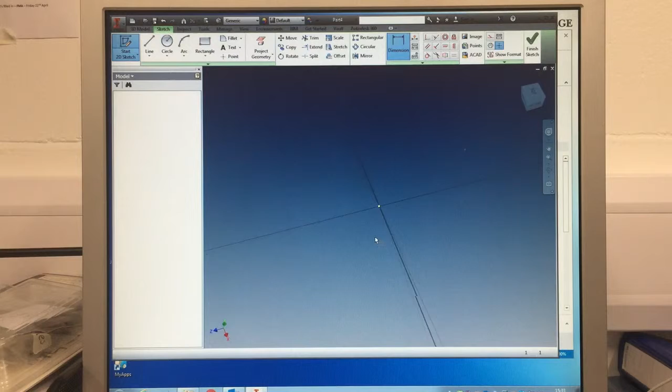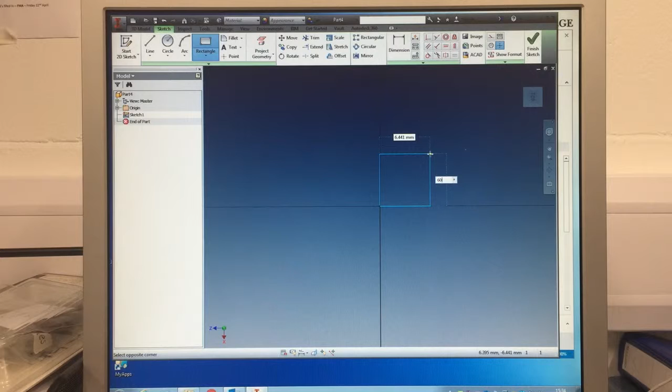Next, take your rectangle, click on the drop down menu and click 2-point rectangle. You can now come down, click on the center point there just once and then move your cursor. You can see the 2 dimensions here. If you tap in 60 for the first one and then press Tab, which is 2 buttons down from Escape in the top left of your keypad, okay, you'll then go to the next dimension and you can put 43 in for that one.

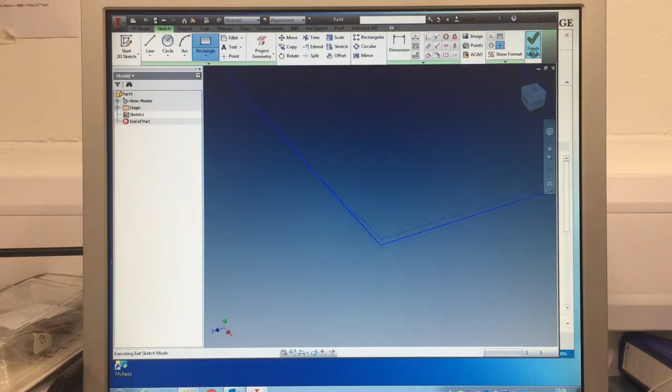Okay, press Enter. Now we're so zoomed in that we can't see our square. So if you click on the Zoom All button here, that will then bring everything into focus. Okay, you can now click on Finish Sketch and we go back to 3D mode. Zoom All again so you can see it all.

Click on Extrude, and your extrude may not have a drop down menu here. You need to make sure you drop that menu down, okay, so you can work on it here rather than over here. It's a bit easier. Change that to 20 millimeters, okay, and then press OK.

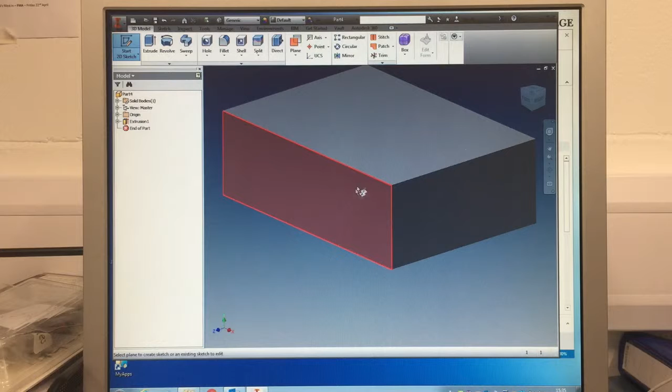Okay, next we want to put a 2D sketch onto the side. That's the long, thin one, okay, not this side or this side, this one here. Put a sketch there. You next want to project the geometry, okay, and this transfers lines from other places onto our sketch. So we're back in the 2D mode here, and we want to project geometry of that line, and that line there. Okay, you can zoom out a little bit.

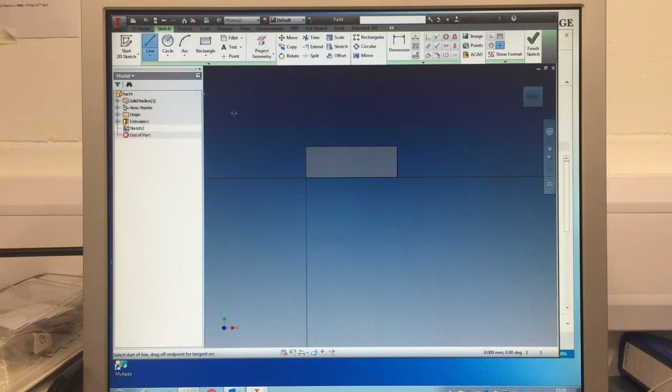Use your line tool next and click on this bottom right hand corner. Click there and you can see here you can change the dimension. So you just click once, don't click and drag. And then if you make sure that it's horizontal, you'll see that the degrees is 0. Make sure it's there on 0 and then you can just enter 10 and then press enter.

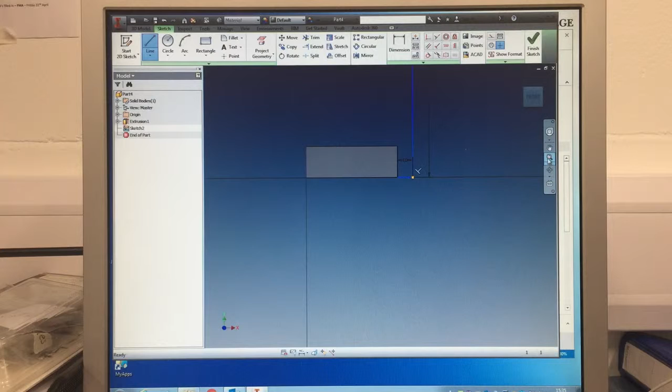Okay, you can now see we're going up, so then make sure you're vertical so that you can see 90 degrees here, and then tap in 140 and press enter. Okay, you can't see the top of a line, so we're just going to click zoom all so we can see it. Make sure you're horizontal again and going towards the left and press 20, enter.

Then come all the way down until you get down to the bottom area there. It should be 120 automatically. Okay, make sure your line is straight where it hits the top of that line. Now your line tool is finished there. You'll need to click once again onto the end there, and then click once again and click on the end there.

Okay. Now the next thing we want to do is we want to put in our housing joint, or an area for our housing joint. So I want you to select 2-point rectangle. I want you to lock onto this line here, click once and let go, and then just draw a square roughly something like that. You're going to use the dimension tool this time.

You can either dimension the height of this square by just clicking on this line and coming out and clicking 20, but that's not the best way to do it, so I'm just going to use my back button to show you how to do it.

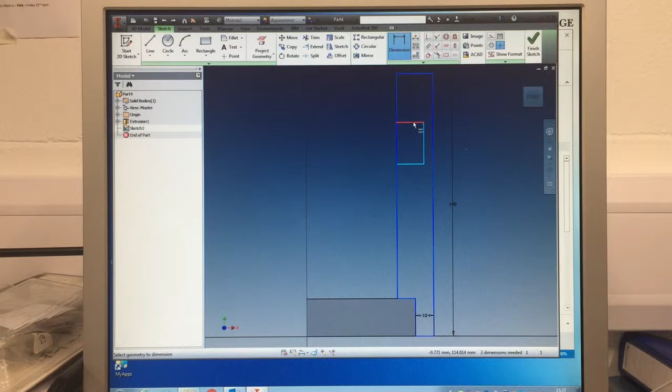The best way to do the height is actually to click between the 2 lengths of the line. So if you click on dimension, you click on the top part and the bottom part of that line, then that dimensions it easily. So click on the top, it thinks you're doing that top line, then click on the bottom of the line, okay, and then come across to the left there. Click there and then you can just put down 20 like that, and that changes that dimension.

You also want this area to be 10 millimeters wide, so instead of just clicking on there and bringing it down, I'm going to click on that line, it thinks I'm doing that 20 line, until I click on the edge here, and that is then between those 2 areas. Click once again and then you can click 10. And that's now changed to 10.

The last dimension we want to do is between the top and the bottom, and this is why I teach you this technique, because you can't select just that line there between there and there. You have to click the top area, it thinks you're doing the width, until you click on that line, and then there. If you bring that out to the side, you can now change that to 40.

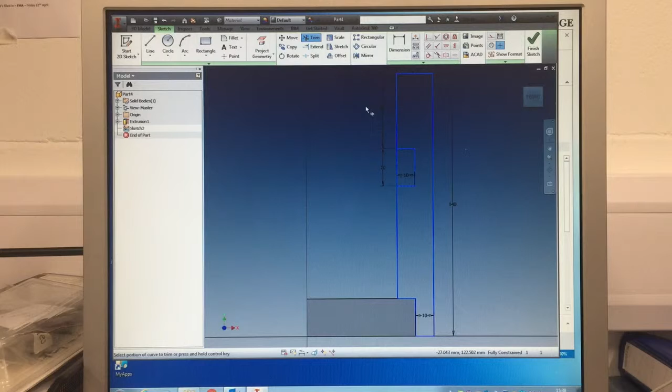Now we want to get rid of this little area here, so you're going to use the trim tool. Click on trim, come and click once, that's got rid of the first line that we drew for this rectangle, then click again and that's got rid of this line that we drew for the whole thing. Okay, and that's now gone.

Finish your sketch, zoom all so we can see it all, come to extrude. You didn't need to select it. If it doesn't select it, you just press that button there and it should select it. It's going the wrong direction, so I'm going to click on this button here to change the direction. Then I'm going to change the dimension to 43.

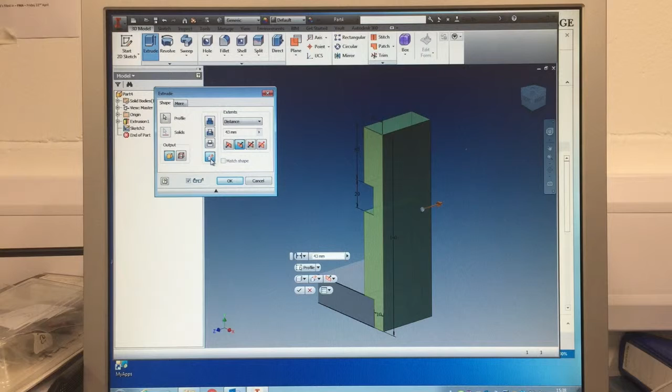Okay. The last thing I want you to do is click on New Solid. New solid means that it is making it a different material, so two separate bits of wood. Okay, then you can click OK.

Okay, so lastly we need to do our last piece of shelf, so we're going to put a new sketch, new 2D sketch. Make sure you always click on 2D rather than 3D. So 2D sketch, click on the side here, zoom into this area here and project geometry of this line and this line. That is bringing it forward onto our sketch.

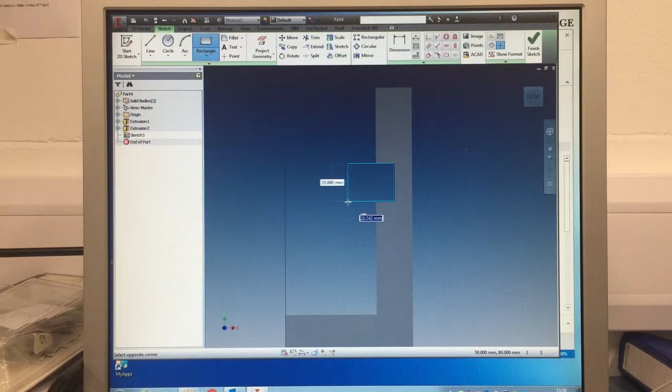Then use a 2-point rectangle, lock onto the top area there. If you bring it down, it locks straight onto 20 because we projected geometry. Then you can just tap in 60. Once 60 is tapped in, you can just finish your sketch, extrude, select that area. It's going the wrong direction, so click that area there, make sure it's 43, and then you can just tap on new solid to make sure it's a separate piece of material.

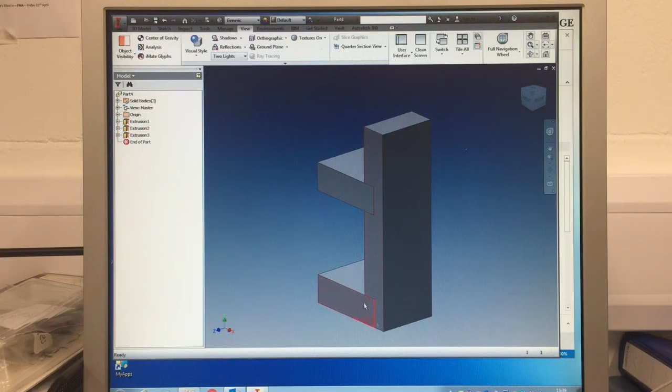Okay, click OK. Now if you're really good at this, you'll come up to the top and you'll just change the view, go to visual style, and you'll change it to shaded with edges, and now you can see those different joints that you've done there. Click back on 3D model and you've finished.